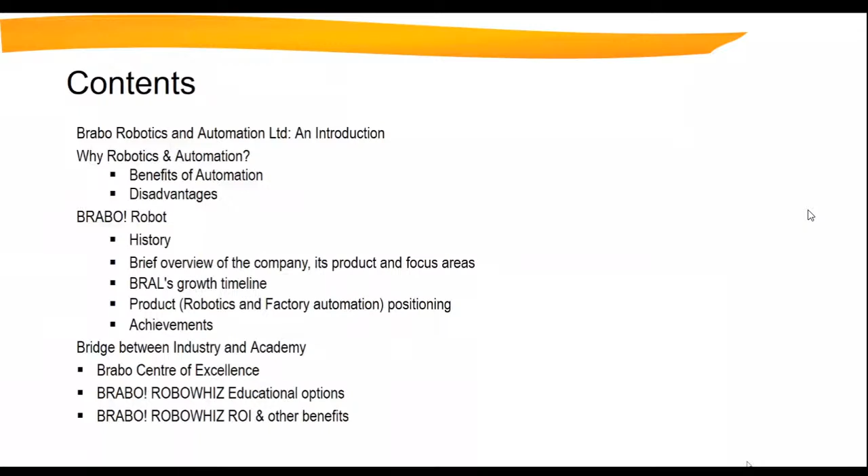And some of the things which I'll explain are what was my experience during my journey, when I started my career in Telco in 90.

Thank you for the good introduction. This was my introduction, already it's been covered, so I don't want to spend time on this. But I started my career in Telco, and when I joined as a GET, graduate training engineer, in Telco, I was very lucky to be part of the first Indian car, that is Indica. I was heading that as a project manager for body shop and press shop. And subsequently, I also had a lot of opportunities in Tata Motors to work on different projects.

In 2008, I joined a company called IWK in the US, and this company was taken over by KUKA, that's how KUKA System India Limited came to be. I joined as CEO and president, and we started more or less from scratch in 2008 onwards, KUKA India, with a very young team. In a tenure of 5 years, we were able to complete a lot of projects, including the Daimler project, one of the prestigious projects, which we completed in Oragadam, Chennai.

Again, I rejoined the Tata Group in 2014, and now currently I'm heading as CEO for Robotics and Automation. As far as my awards are concerned, he has already spoken about that. As far as extracurricular activities, I was a professional badminton player, I played for nationals in juniors and sub-juniors.

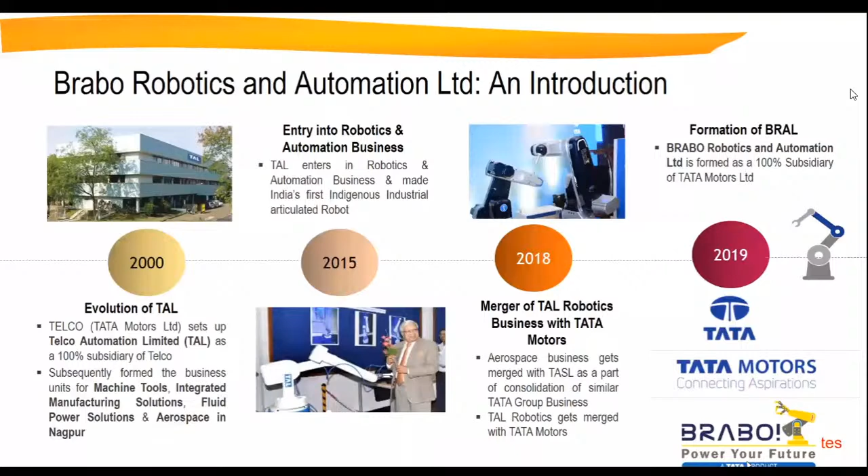Now, why robotics and automation? If you see how the measurement is done for any country for robots - against 10,000 operators, how many robots are working in that country - that is the measurement of robotics in a particular country.

Today, if you see, robots started long back, more than 5-6 decades ago. However, in India, it has taken a very, very long time, and still we are not at par compared to the other developed countries.

Against 10,000 operators, today if you see in India, in 2014 only 2 robots were there, and by 2018 it has become 4 robots against 10,000 operators. Whereas other countries like Japan and Korea have got more than 700 robots against 10,000 operators in 2018. So there's a huge difference.

Currently, China is growing in a very big way. Today they are producing more than 1.2 to 1.5 lakhs per year industrial robots, and they are going very fast. The question comes here: even population-wise the Chinese are number one compared to India, but still the number of robots produced in China is more. So this needs to be thought of. Why are Chinese people using more robots compared to human beings?

That answer lies there itself - what will happen to the operators? Second thing is South Korea and other developed countries are growing very fast, and these are only the figures related to industrial robots.

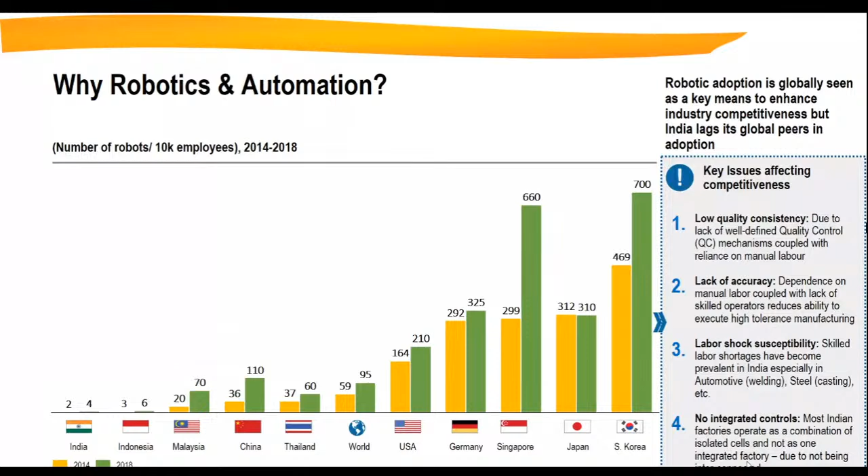So in the global market, value-wise, the industrial robot market value is increasing day by day. By 2024, as per IFR and Roland Berger, which are sources we got information from, 147 billion US dollars will be the revenue only from this. And the number of robots will also increase by 19% by 2024.

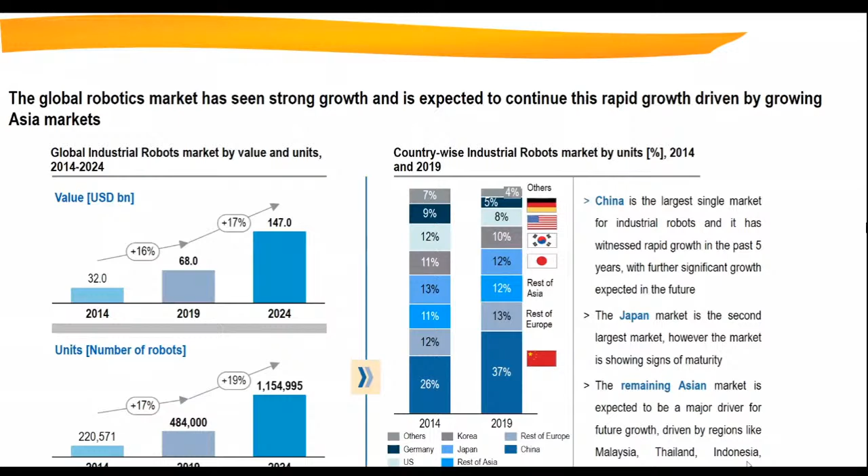Through automation, as I already explained, we get accuracy, quality, granular process monitoring, less labor dependency, scalability, lightweight, reduced risk, continuity, cost reduction, productivity, and other things like compliance and addressing workplace health and safety.

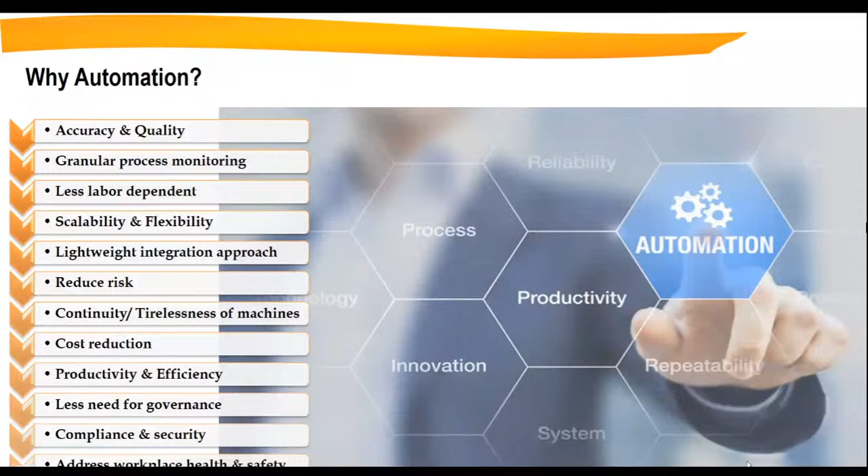So what are the benefits of automation? The most important thing is productivity. Second is quality - we have good quality, consistency in the quality.

There's robustness in the flexibility of processes, because if you change the process, it should be validated again and again before we launch the product into the market. Then there's increased consistency of output, because the robot will continuously work without any kind of break - lunch break, tea break, or biological break. And there's reduced direct human labor cost and expenses.

What are the disadvantages of automation? One is the development cost - we need a lot of capital for producing new products, especially in the automation area including robots. Second is high initial cost for installation as capex for any industry.

Third thing could be called unemployment, but which I personally don't agree with, because when you create a robot, you need to have certain people. Today, when we started in TAL and Tata Group, nobody was employed in robotics. Today we have 100+ employees working only in the robotics and automation area. And not only that, the vendors supplying us components and material for the robot are also getting different kinds of revenues, and they are also working more on how we can reduce manpower and increase productivity.

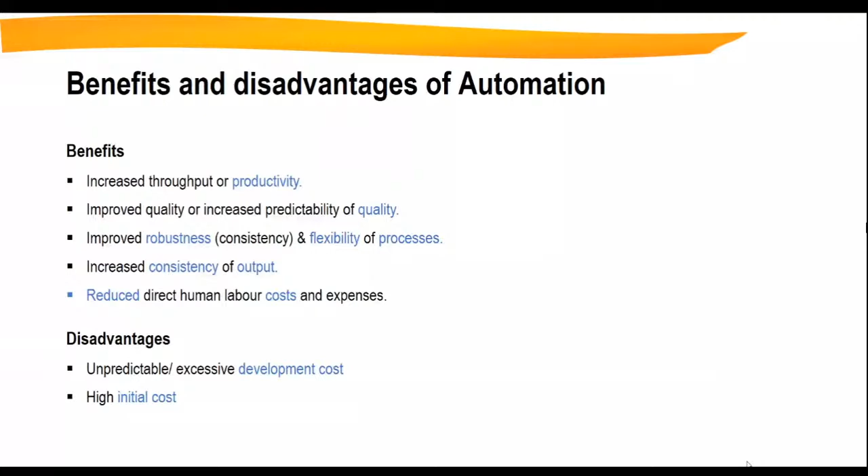Of course, this manpower which has been reduced is also used for different skill sets. That is the main reason I personally feel we are not deleting or reducing manpower, but we are only changing the skill set from one level to another.

To address all these things, we decided to create the first Indian robot, as it was our dream and we wanted to make it successful. With my current team and the team which I have, we came together and decided that we should create our first Indian robot, because that is going to be the future. Today, if you see, that is a need of an hour. Without the robot, you can't do anything, most of the things cannot be done.

Certain things we call a 3D robot. Now we call it a 4D robot, because all this robot can be used for dull, dirty, dangerous activity, and now the 4D, I call this a difficult activity. So this can be done very precisely and accurately, and with high productivity, only by the robot.

That is the reason we thought, okay, we'll start with a robot which is like a human arm. Basically, a human arm has got almost approximately 700 to 800 millimeter reach. The maximum, as per the ILO standard, the operator can lift up to 10 kg payload capacity, and it has got a speed of approximately 1000 millimeter per minute.

Considering all these things, we decided to go for much higher speed. Of course, the operator also can go for much higher speed, but that is not necessary in most of the industry. So we decided that we'll go ahead with this specification, and we created 6 kg payload capacity for lighter applications, 10 kg, 12 kg, and 20 and 30 kg payload capacity. This has been developed and we have already launched into the market, and we got a good response from the market for these robotic arms.

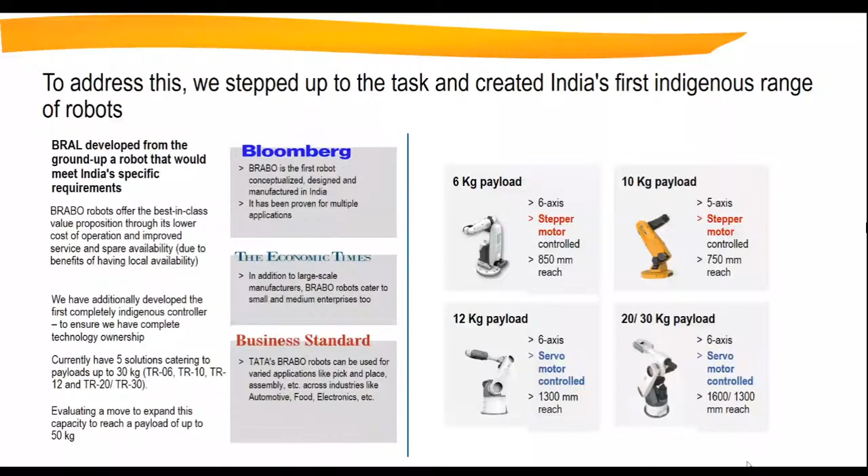If you see the journey of the robot, in 2014 we made the first Indian prototype robot, and then we created the first indigenous controller, which can support our robot.

In 2016, we launched this robot in the Make in India program in Mumbai, where we wanted to test the market, and we found that there was huge demand coming up, especially from the MSME and SME sector. That was our focus, because the idea was how can we create a robot which is affordable to the MSME people, and they can use this robot very easily. It should be very easy to use by anybody—those who don't know anything about robots should also be able to use it.

In 2016, we got the required certificates like CE and IP, which are mandatory for India sometimes, and also mainly for the European countries—these certificates are a must. So we got those as well.

In 2017, we also introduced factory automation. It's not only the robot—along with the robot, we started giving different systems and solutions, and not only using our robot, but we can integrate any other robot as well. That is why we introduced factory automation and services. We received a lot of awards.

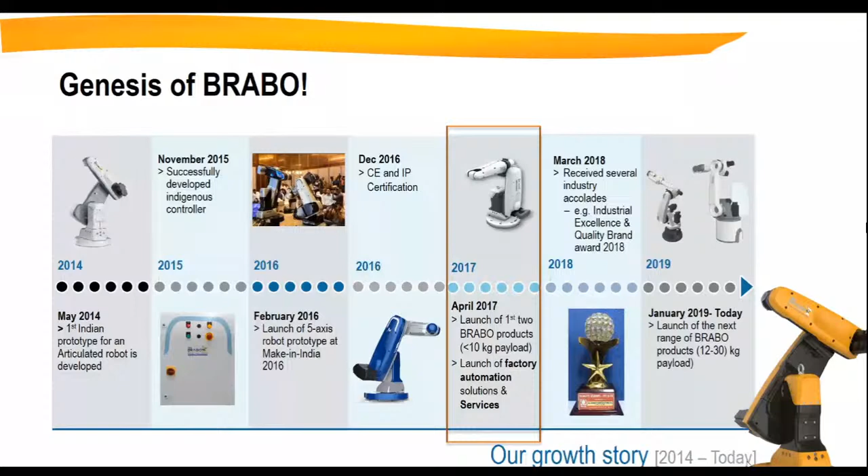When we started the journey, we used to always ask the customer, the end user, what is a need, what is a necessity, what kind of robot are you looking for, and what are your expectations. The main thing that came up was why the robot was not successful in India—because at the end of the day, nobody was really manufacturing the robot within India. Most of the robots are coming from outside. Today, if you see all the robots in Tata Motors, Mahindra and Mahindra, Volkswagen, everywhere, most of the robots are coming from outside India.

When we made the first robot between 1995 and 2000, that time also we had a lot of issues with spare parts, because whenever there was a breakdown in the robot, we had to wait at least 2 days to 1 week to get the spare part from abroad. Second, when there was a major breakdown, there should be service availability, but no experts were available—we had to get the service expert from outside India, either from Japan or Germany. So these were the issues.

So when we started finding out the criteria of what the MSME people require, how they would like to have the robot and services, the first thing that came up was the availability of spare parts. Then second was easy to use. Then service turnaround time, because as I mentioned, sometimes we used to lose a lot of productivity that got hampered because there was no service person available around.

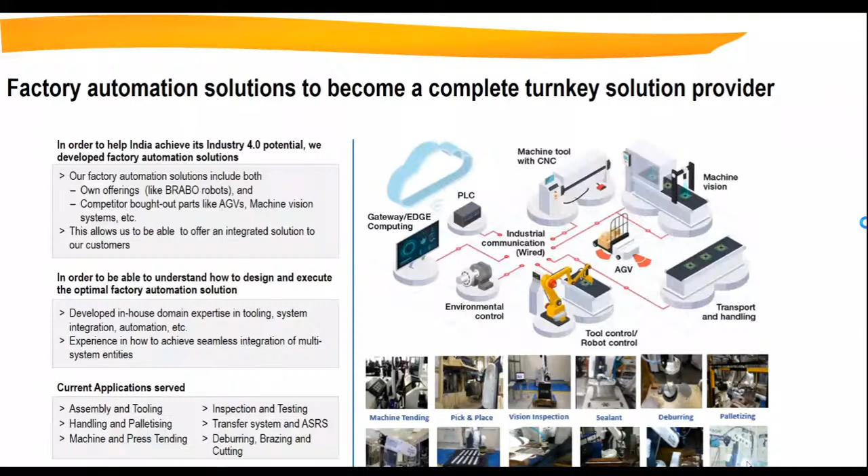So we are going ahead and trying to find out how we can support further in the robotics area, because this is only the first step for robotics, whereas there is a long way to go. I will discuss further what steps we are going to take in future.

Our target industries include automotive, castings, forging, FMCG, pharmaceutical, machine shops, plastic, electronics, railways, ordnance factory, aerospace, and general industries. These are the industries where we feel we can give complete turnkey solutions. And apart from that, we have target customers in those industries, and we feel proud whenever we get a repeat order because they are satisfied customers today.

So in the short span of time after BRAL was made, from 2017 onwards after launch, we really got good traction in automotive, FMCG, aerospace and defense, and industrials. These are the very happy customers which we currently have, and we are supporting them on a continuous basis.

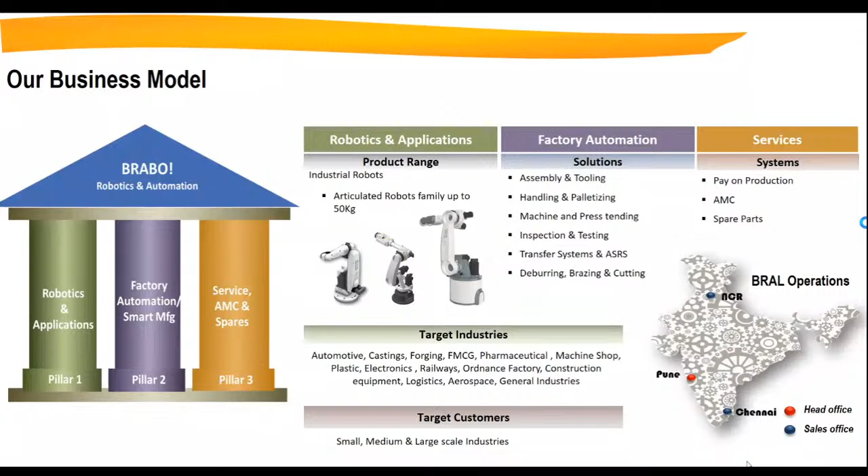As a company, we got a good technology award starting in 2015, along with Make in India award and quality brand award. One of the biggest awards we feel, as a team of youngsters, is that our company name got introduced in the IFR, the International Federation of Robotics, in 2018, as one of the top 30 robotic companies to be watched by the IFR. That was an article published across the world, so we felt we had been recognized globally.

Industrial Excellence Award in 2018, Best Product Innovation Award again in 2018, and Tata Innovista, which is an internal Tata Group award but a very prestigious one for us, because getting that award required a lot of struggle and preparation. As a company, as a team, we received that award in 2018.

And Automation Expo, we've gotten many awards there. Earlier we got the Best Technology Award, and now we got a Make in India Award in 2019. ASSOCHAM, another well-known body, gave us the Emerging Technology Award, which is again a prestigious one for us.

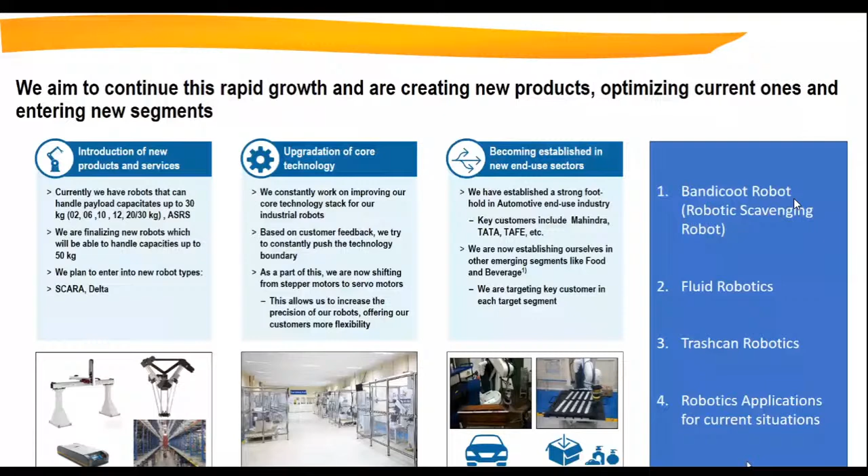So the challenge now is how we can bring this about. The main topic, why I've been called to give this presentation by DY Patil, is how we can bring industry and academia together.

Bringing students to employment is extremely important. Today, a lot of students are looking for what to do after graduation or post-graduation — what should I do, what skills do I have, whether they fit with the industry or not. Many students have different dreams, but when they go to industry, they get different kinds of jobs. Sometimes frustration comes, and real talent cannot be used by the industries.

Sometimes someone is too talented in design, but normally used either in application, production, or sales. But the main idea is, how can I reach my destination?

So at BRABO, currently, for those who are passionate and want to work in robotics, we have created a center of excellence for automation and robotics, so students can discover whether they are good at sales of this technology, introduction of new technology, manufacturing of this technology, or introducing software or hardware, and how they can assemble a robot in the shortest time.

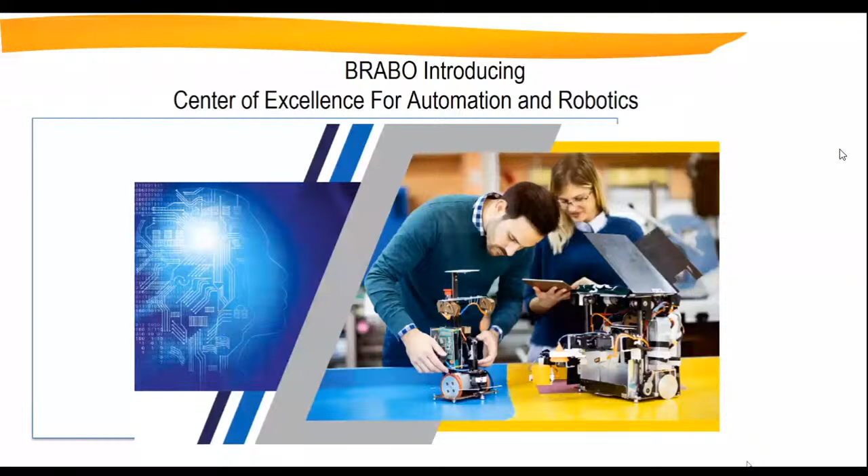So we have created a center of automation and robotics, and for that we also create labs for different institutes — it could be a mechanical section, electronic section, the robot itself, research platforms, and technical assistance. As I mentioned, students can explore their own talent and skill sets to see where they can fit.

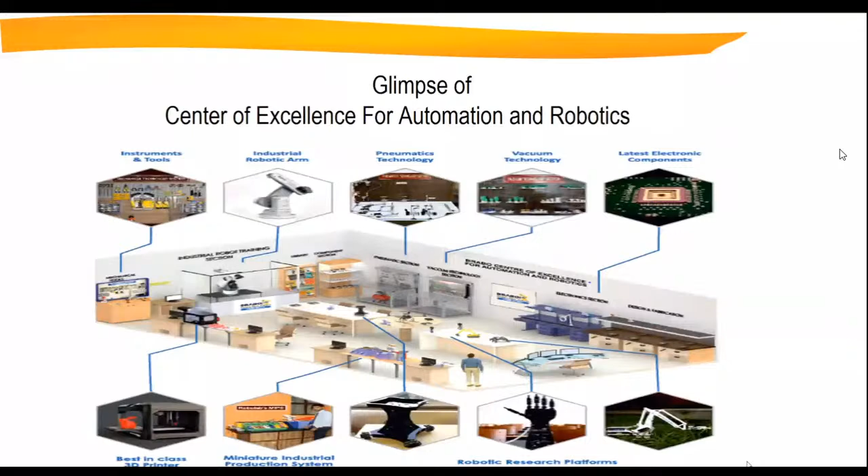These are glimpses of the Center of Excellence for Automation and Robotics, where we give a complete turnkey lab and students can explore, because in robotics and automation you need all types of disciplines, from mechanical to electrical. Civil is difficult, but today even civil is getting introduced, because civil people are building whole buildings, houses, and bungalows using robots. So most disciplines in any institute or academia can participate in robotics and automation.

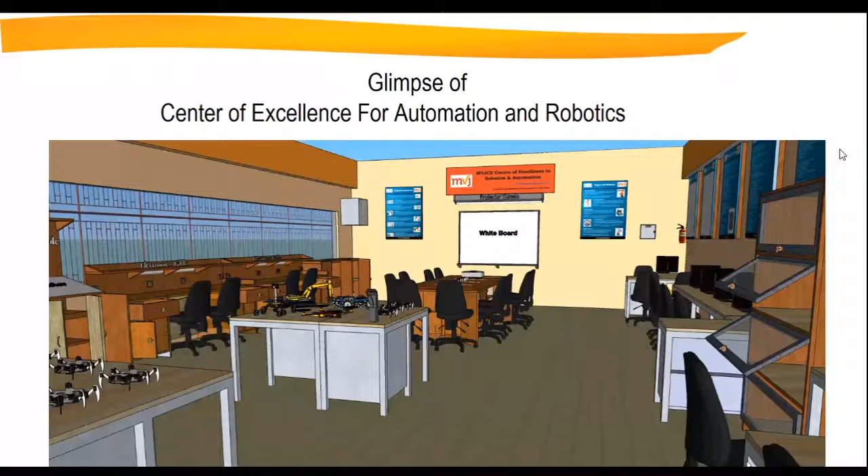So this is the lab we create, which will be used by institutes — these are dedicated labs, and it's worth spending on, because at the end of the day you are creating real students who are readily available for the industries.

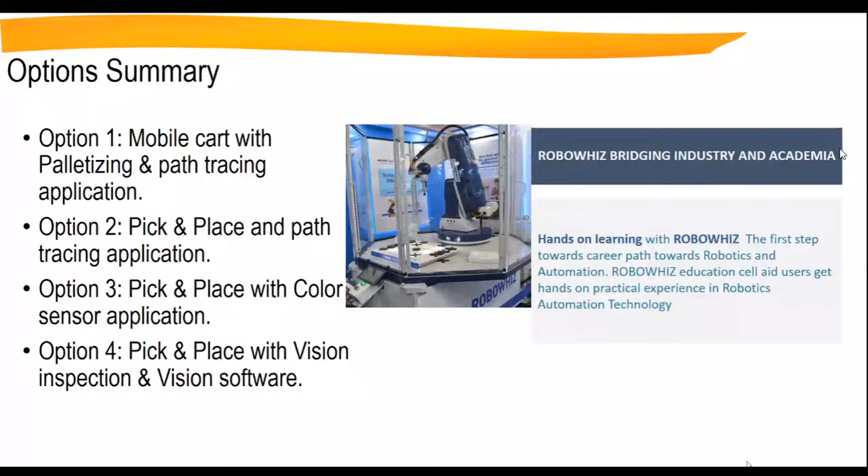So we have different options in the education sector. One is a mobile cart for palletizing — of course different applications can be made, but currently we have this mobile pallet cart. Then pick and place for path tracing applications, pick and place for color sensors, and also pick and place for vision inspection. These are a few examples where the 10 kg payload capacity is used for creating the EduCart.

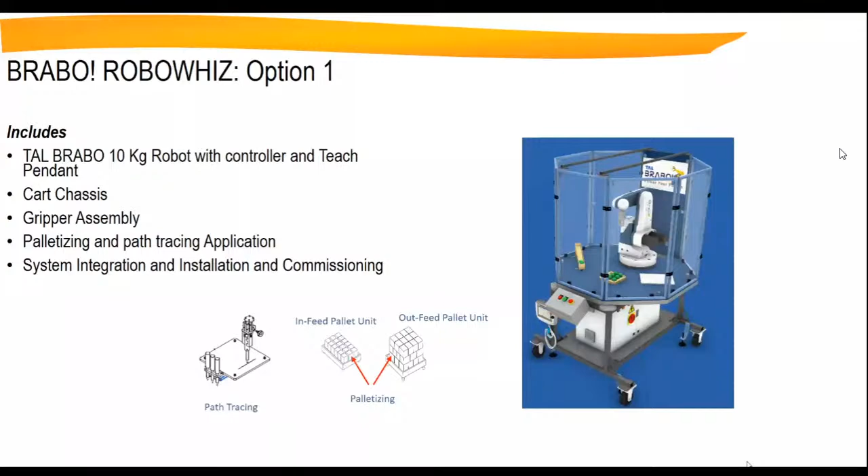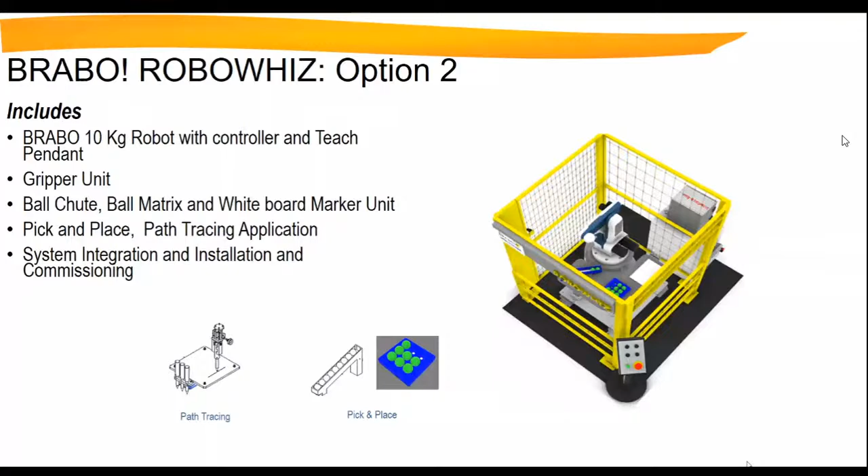Option 2 has got again a controller teach pendant and is a fixed one, which has got a gripper for handling, sensing, and pick and place. This also can be used as a game, but basically it gives a lot of education to the student on how the robots operate and what are the functions of the robot.

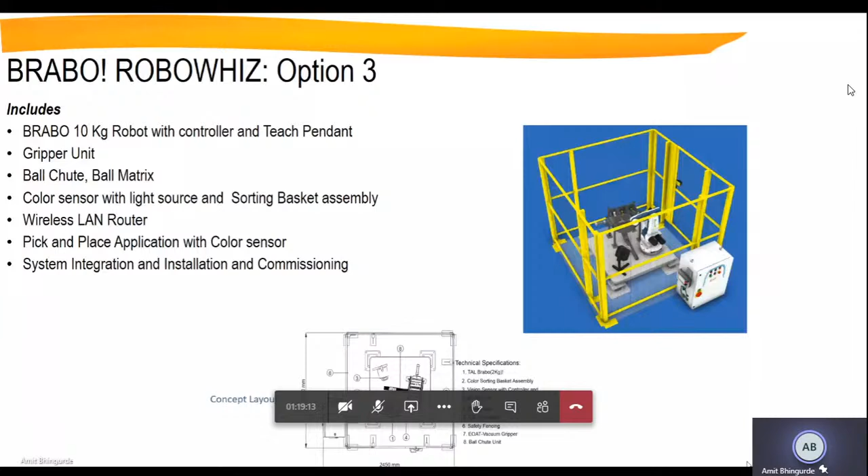And this is a third option. Basically, it has got color sensing also. It can be used for pick and place application with the color sensor, and different colors can be identified. So vision is one of the additional options given in this particular ROBOWHIZ.

So these are the different options we have created, based on what the student or people who want to go for that particular thing can do, and then they can keep on introducing new concepts and new applications. But our idea is that the students can create a new application and come out with different ideas by using this robot. You have a product now, and then you need to find out what different applications students can come out with.

So, as I said, ROI is basically of two types. We can either sell the complete cell to the academia, or we can give it on rent. The only thing is academia has to confirm how many students will get trained per month or per semester. Based on that, we can have an agreement so they don't have to buy the complete robotic setup, but can get it on rent and learn from that.

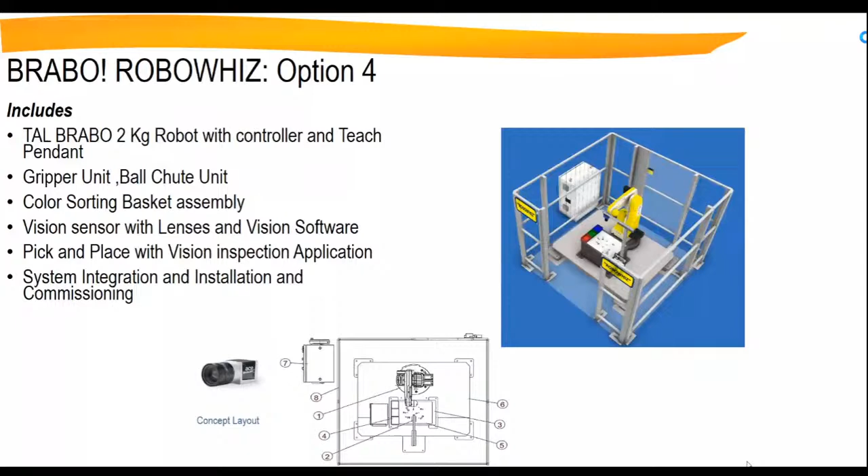And now we are going to launch very soon the training program for robotics and automation online, because of the current situation we need to give training to students based on online. We are coming out with different options and innovative ideas, which we will definitely be informing you about early, maybe in early July, so you'll be able to enjoy the training program sitting at home and ask questions. It's an interactive session, and you can actually do the programming. Whenever the students go to college, they can do the practical testing of the robot.

Now, these are the basic questions you may be looking for: what does academia need to do? One good initiative you people have started is faculty training and student training, which is a good part of that. But going forward, you need to really train the team such that they are practically available for the industries.

Most of the time, when we get students from academia, they have done certain work in robotics, but when we do interviews and interact with them, we find that only very basic things are known, like what is an arm, what is a sensor, what is a motor, but they don't know how to really use that, what the maximum usage can be, and what the applications are. So with such kind of training and industry interaction, we will really understand how it can be made more useful.